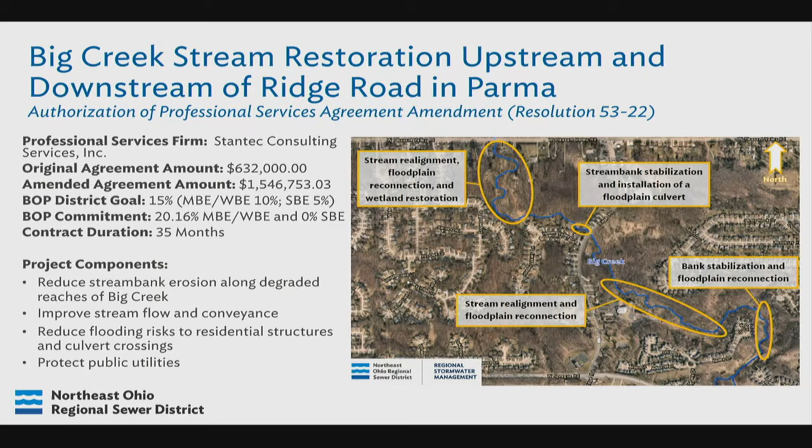Okay, so bottom line is they came up with a good approach to solving the problem, realizing that in this particular area there are a lot of issues with the narrowness, the shallowness of the creek, and the fact that all the bridge structures kind of control the amount of flooding that occurs in it.

So their approach to how to solve for these issues met your expectations? Yes, Big Creek has a ton of impervious surface and a lot of problems. We really needed to come out of the master planning phase and get detailed information, and through this pre-design we've gotten that. We really think that they've hit it, and we'd like to continue forward to execute this project.

Okay, thank you. And then just briefly, 54-22, looks like we're changing our approach to how we're dealing with some of these watershed organizations. Could you maybe explain that a little bit?

We partner with watershed organizations. There's an Ohio 319 grant program that provides grants for watershed-related activities, and our watershed groups have been pretty successful. Along the regional system, there's a need for a local match on these grants, and we're happy to provide it because it provides benefits to the regional stormwater system.

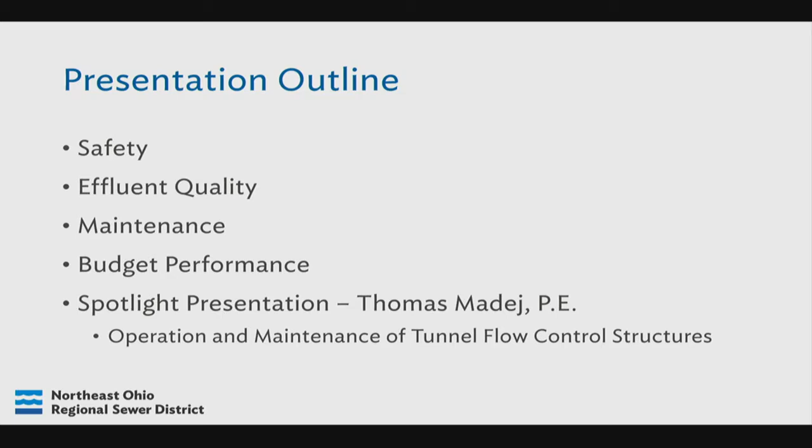Good afternoon. This is the operation and maintenance update for the fourth quarter of 2021. We'll talk about safety, effluent quality, maintenance, budget performance, and then we have a short but very interesting presentation from Tom Madej, Deputy Director in O&M, on operation and maintenance of tunnel flow control structures.

When we look at lost and restricted work days for the year, we had a total of 266 lost or restricted days. This is much better than we've seen over the last several years. I think it's due, at least in part, to the focus we've had on safety within O&M after we had a pretty rough year in 2019. We had 5 events that led to those lost and restricted work days. Two of those were strains, one was a burn, one was a cut, and one was a slip and fall.

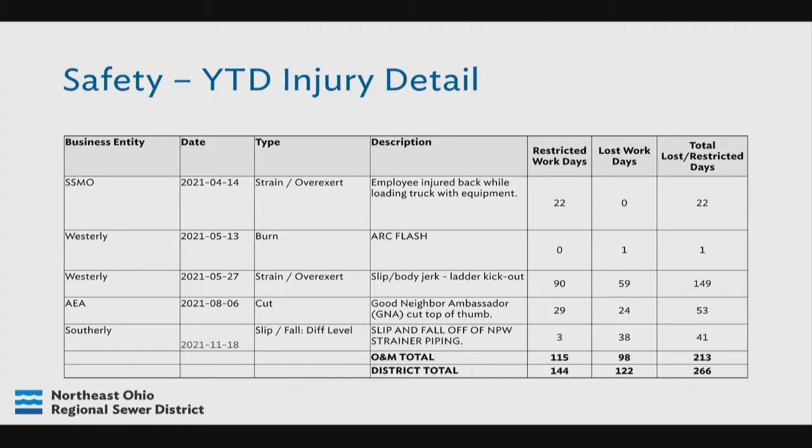This table shows a little bit more detail about each of those events that led to a lost or restricted time incident. The one thing that always stands out to me when looking at these is we have one incident here in the middle, an incident at Westerly, that accounted for more than half of the days off. So 5 incidents overall; one of those led to about 70% of the days off in O&M, more than half of the days off or restricted for the district.

Looking at the DART rate, which is the number of incidents per 100 full-time employees that result in lost or restricted workdays, we had a rate of 1.02 for 2021, which is below our target of 2.0.

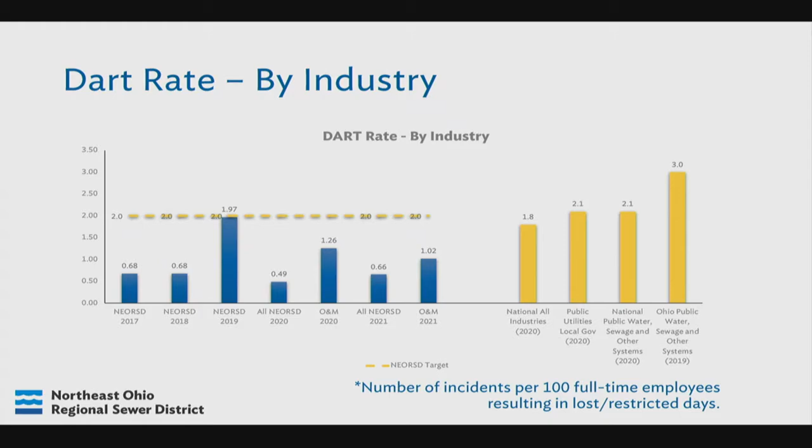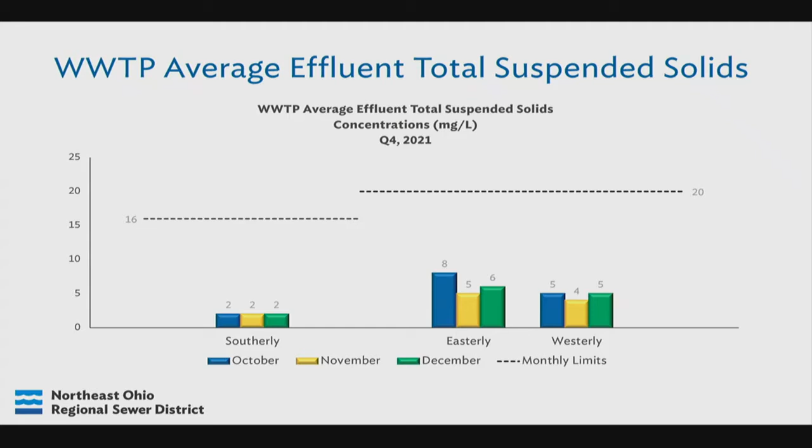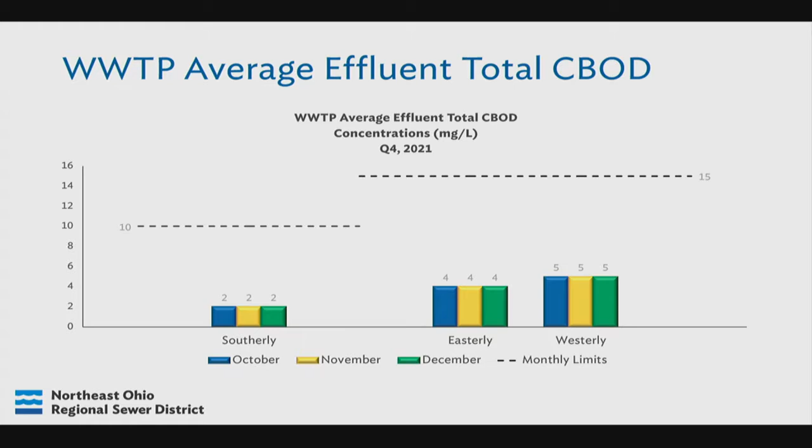Thank you. Looking at effluent suspended solids at all three of our plants, we are below limits for each month during the fourth quarter at all three plants. We had similar results for carbonaceous biochemical oxygen demand, again below the limits at all three plants for the entire quarter, as we did with phosphorus.

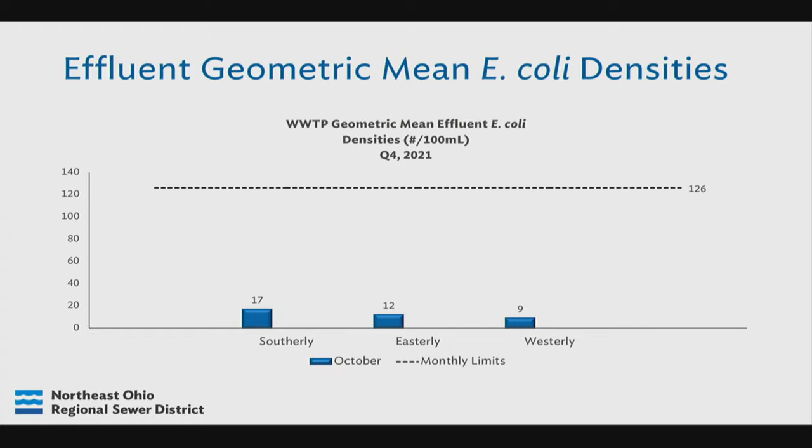The E. coli densities for October were also below our NPDES permit limits. I'm only showing October because we only monitor E. coli and disinfect our effluent from May through October by permit. So we end that on Halloween at midnight, and then we'll start up again on May 1st.

At the end of the year, I'd like to provide a brief overview of an operational summary when we look at our plant effluent. For 2021, we treated a total of about 77 billion gallons of wastewater at our three treatment plants. This was down from the prior year by approximately 10 billion gallons, based completely on flow coming into the plants and weather.

We removed about 85 million pounds of total suspended solids, 34 million pounds of CBOD, and about 1.3 million pounds of phosphorus.

One thing I want to point out is that our effluents are monitored 24/7. We have to meet permit limits 365 days a year. Throughout the course of the year, across our three plants, there are approximately 5,000 compliance points, points in time where our effluent is compared to some standard in our effluent permit limits. I'm very pleased to say that for 2021, we had 0 permit excursions at all of our plants.

That's great. I want to make sure that myself and our staff do not take this for granted, because it's quite an accomplishment. It's not easy, and we do a really good job year in and year out of coming close to not having any permit issues. In 2021, we had zero.

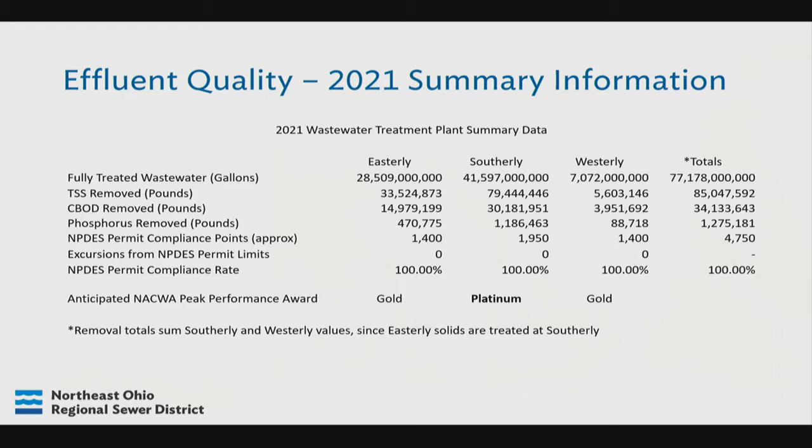It's a job well done, and a credit to the men and women in the organization in dealing with all of these environmental challenges. We're always subject to the weather, whether it's storming or not, heat and other things, large snowmelt, et cetera. And then you've got this large combined system where, depending on what's happening outside, flows go up and down. So the ability over some period of time to manage this at a high level is a cardinal accomplishment. I want to add our congratulations on behalf of the board for the job well done. Thank you.

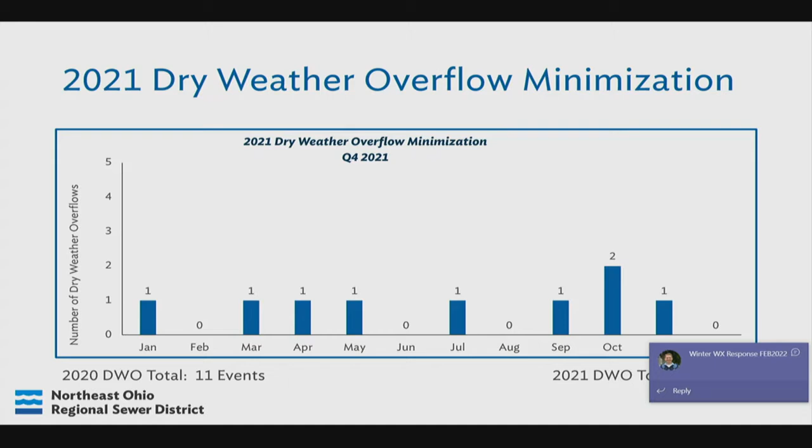Moving on to maintenance and looking at dry weather overflows. During 2021, we had a total of 9 dry weather overflows. That compares to 11 the year before. Most of these were caused by some kind of blockage within the system, as shown on this chart.

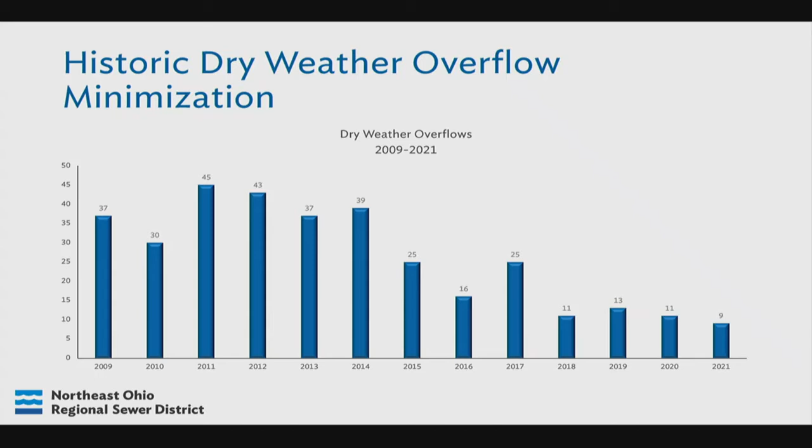Looking back to 2009, when we look at the number of dry weather overflows we've had, 9 is the lowest we've seen tracking back to 2009. And for the last 4 years or so, we've been very low. I think this is attributable to both the improvements the district has made in the collection system and also the maintenance efforts of our staff.

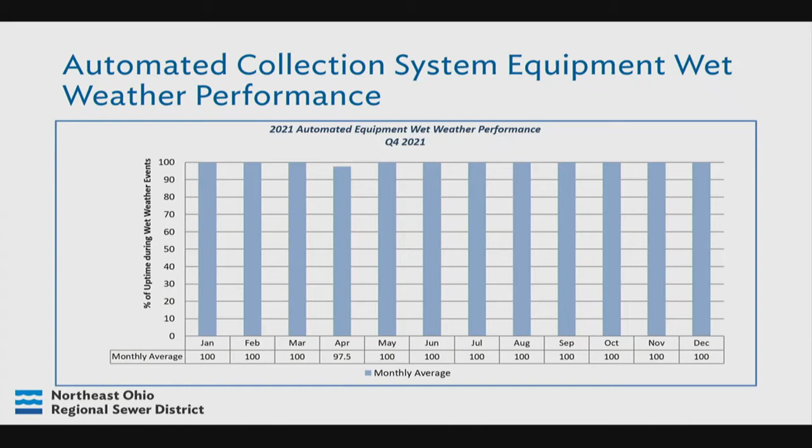Are there any questions on the maintenance? I'm sure that the peaks coming down from the levels they are to 1 or 2 a year also have a lot to do with the long-term control program we're going through, and it seems like our targets are 1 to 3 a year at the end of the program. So it seems like we're well on the way to accomplishing those goals. Yeah, so what I'm showing here is dry weather overflows. Okay, I'm sorry. So the 1 to 3 per year is during wet weather. I'm sorry. Yeah.

And then the last section I have is on budget performance. So for the year, for the 10 O&M budget centers, we had a total operating budget of about $62 million. Through this week, we booked expenses of about $56.6 million. When we look at our spending for 2022, it's almost exactly in line with 2021.

Okay, if there are any questions, I'd be happy to take those. Otherwise, I'll turn it over to Tom. That's pretty good. Okay. Thank you. Thank you.

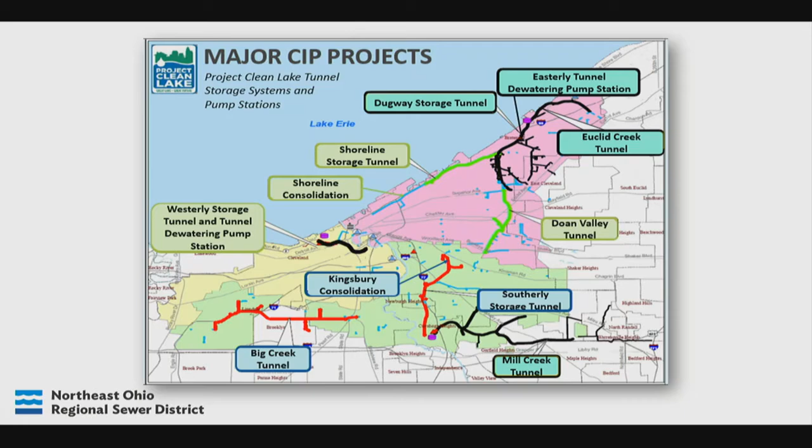One of the benefits with Project Clean Lake and the tunnels associated with Dugway and Euclid Creek Tunnel was elimination of regulators. President Brown mentioned regulators indirectly, the 1 to 2, 1 to 3 overflows per year. Frank clarified that with dry weather overflows. These regulators touch both things—they provide a relief point during wet weather events, rain events, discharging to a waterway, Lake Erie, a creek, or river. Project Clean Lake eliminated that discharge. So now, as opposed to discharging to a waterway, it goes to a tunnel. That's a big benefit to the district, a big benefit to the environment. Also a benefit to O&M is less assets to maintain.

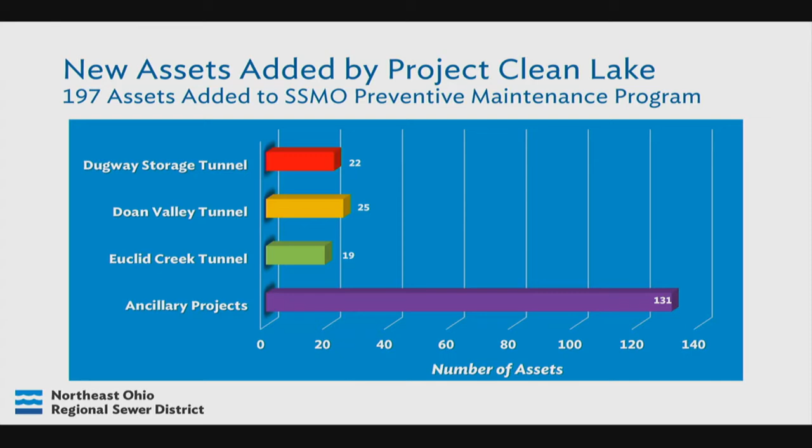One of the assets we received from the tunnels is these flow control structures. The flow control structures provide 3 benefits: it's an entry point into the tunnel, it controls the flow into the tunnel, and it cleans debris from the water going into the tunnel. So what I wanted to do is step through how the flow gets into the tunnel, and then we'll talk about some of the maintenance associated with this. On the left-hand part of the screen, you've got combined sewage coming in—again, this is from Consolidation Sewer that in the past would have gone to the environment.

So it's coming through this primary bar rack, dropping down to this grit sump area, going through the wedge wire, and then eventually into the tunnel.

The primary bar rack is basically a spacing of 4 inches, and it's going to get the bigger debris that floats, woody debris, things of that nature. As the flow drops down into the wedge wire area, it's a smaller spacing, and it's going to get the smaller debris that's not going to go into the tunnel. And if the flows get high enough when the wedge wire is being blocked off, we have this floatable bar rack up on top that's also going to capture the bigger debris, the floatable debris, leaves, wood, etc.

This one also has a gate. We have these gates at 8 locations. There's a total of 9 of these diversion structures, but that controls the flow into the tunnel. So if the flow gets high enough in the tunnel, the gate shuts off and we stop the flow into the tunnel.

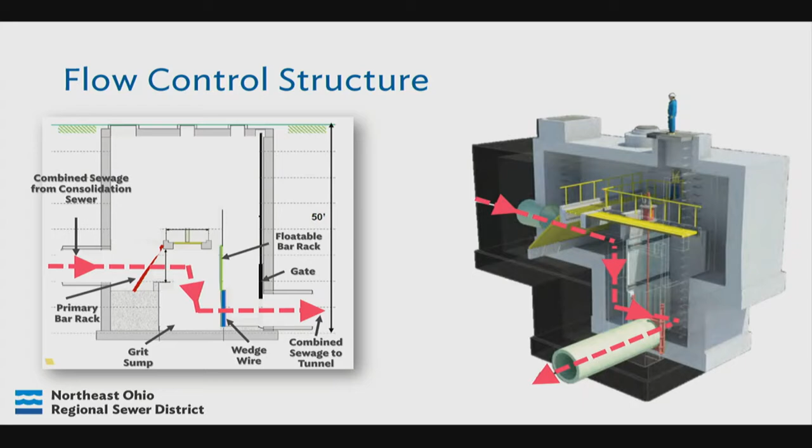So looking at the maintenance associated with this. Looking at the left one, that's the primary bar rack, and again, there's a spacing of about 4 inches between those bars. One of our staff is basically raking off all the debris off the rack. And if you look to the left, there's a vac. We have a jet vac up on top, which I'll get to, but that's sucking the debris out from that area. Looking to the right, a little different area.

If you look at the bottom, that's the wedge wire, which I mentioned, and above that's the floatable bar rack. What we do in that case is we're basically water blasting off that area and getting the debris out. It depends on what's going on with how much debris is going to be in there. Either at that moment or in the future, we'll pull that debris out. So there's a decision made by the staff there and also the supervisor about whether you pull debris out, let it settle down, or take it out in a future maintenance event.

And then he's actually standing in the grit sump. He's actually standing in water, kind of cleaning out that area. So it's very labor intensive and it's very maintenance intensive as far as cleaning that out.

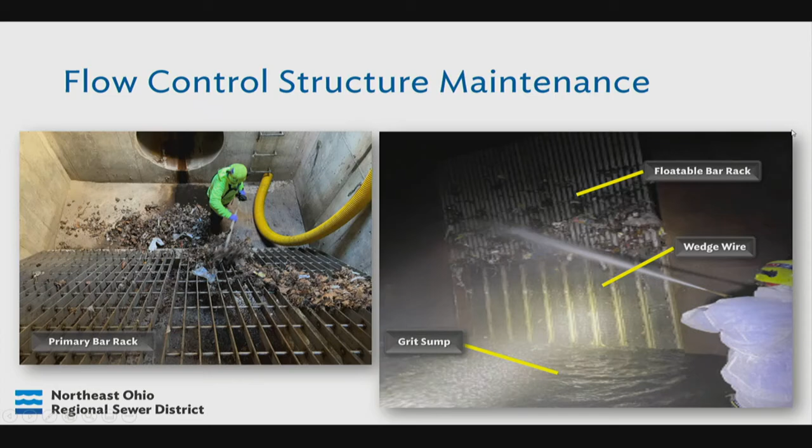To give you a perspective of how big some of these are, this is our Euclid Creek number 2 site. Typically they're 30 to 50 feet deep. If you look on the left, there is the wedge wire at the bottom, the floatable bar rack up on top, and then some debris that we had to clean out after the fact. So the whole point of this picture is to give a perspective of how big the structures are.

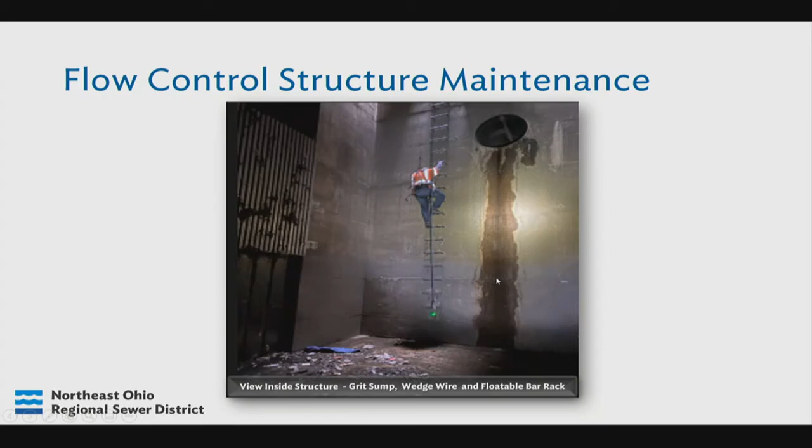Up on top, we have equipment that's going to clean out and help out cleaning out those bar racks. To the left, we have our jet vac, and then we have this black hose that goes down. So basically, we have a vac hose at that point. Also here, we have the hose that's going to be high pressure, to be able to water blast those bar racks. In the background there, we have a crane truck and an operator who's actually dropping a person down through a man cage into the structure.

In some cases, we have to drop them down, and in some cases they can go down the rungs to get down to the structure to do maintenance. So that kind of gives you an idea of the setup of the equipment that we have up on the surface level.

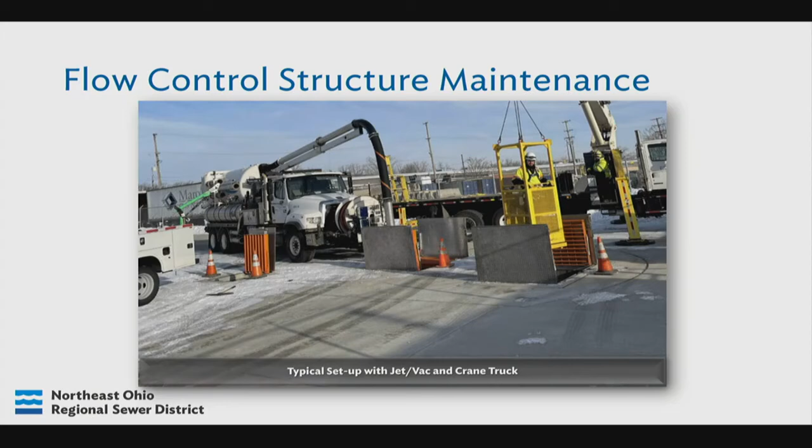Let's look at some data. So we went back starting in 2020 and looked at how much debris we're removing from the bar racks. If you look at 2020, with Euclid Creek Tunnel, it's about 63,000 pounds, and then on Dugway Storage Tunnel, about 79,000. And if you look at 2021, about 77,000 and 115,000 for Dugway Storage.

So it's about 330,000 pounds of debris we pulled off those bar racks, which could have gone to the environment, which would have potentially settled out in the sewer. But nonetheless, we pulled them off either the bar racks or the grit sump area.

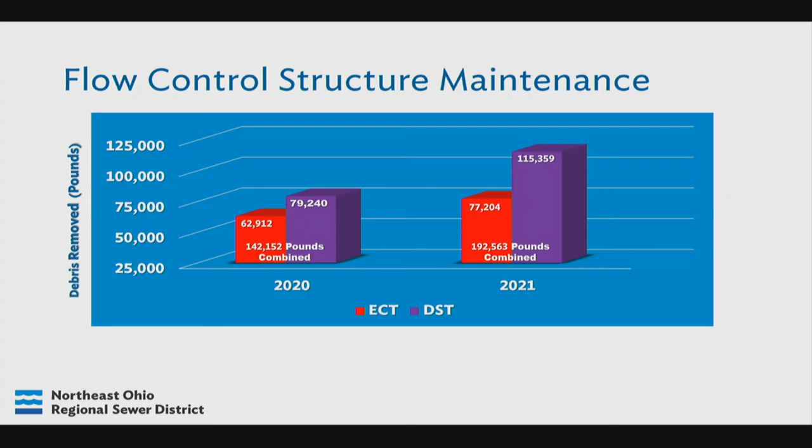Looking at the tunnel dewatering pump station, this is operated by our Easterly plant, not the maintenance collection system maintenance group. If you go back to 2018, we pumped about 156 million gallons from the tunnel. In 2019, 172 million, then 616 in 2020, and 434 in 2021.

In 2020, Dugway Storage Tunnel came online. Prior to that, Euclid Creek Tunnel was online. So as the years went on, more assets were coming online. In 2020, Dugway Storage came online, and in 2021, Doan Valley Tunnel came online. 2020 was also a wet year, which correlates with what Frank was saying about the data. So as more assets come online, more is being pumped.

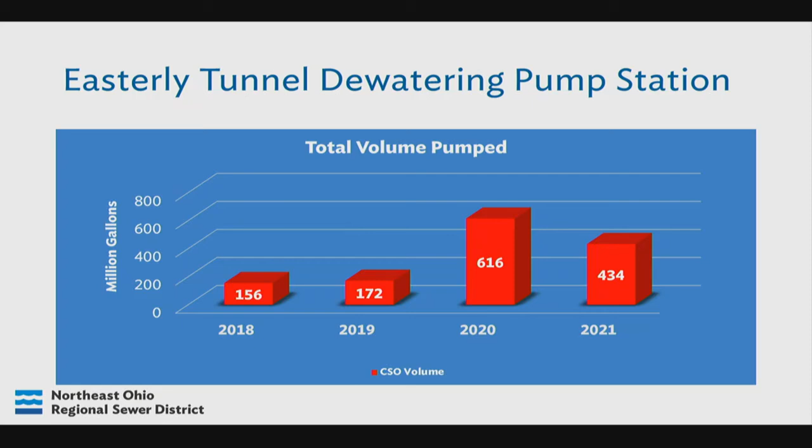So it's about 1.4 billion gallons we pumped from the tunnel over that time period, which would have gone to the environment under the old system. That's a big benefit to the district and the environment in the local area, getting some level of treatment before discharge, as opposed to going directly, which goes back to the 1 to 3 to 4 overflows a year.

All right, so who's doing all this work? The way it's set up, we have our Maintenance Services Department and our Sewer System Maintenance and Operation Department, which we call SSMO. Kevin Zabrowski is our Superintendent of Maintenance Services, and he's also the operator of record for the collection system.

So he has reporting responsibilities to the EPA. Karen Solko is the Assistant Superintendent for Maintenance Services. Underneath Maintenance Services, SSMO is one of the departments - you've also got building maintenance, fleet services, and admin services. So Kevin has a suite of departments underneath him that he's responsible for. But specifically for SSMO, Eric Tankel is the manager, and there are 5 supervisors underneath Eric: Joshua Dress, Greg Mitchell, Dave Glissick, Brian Stapleton, and Stacy Juby. They're responsible for the day-in and day-out maintenance and operation of our collection system.